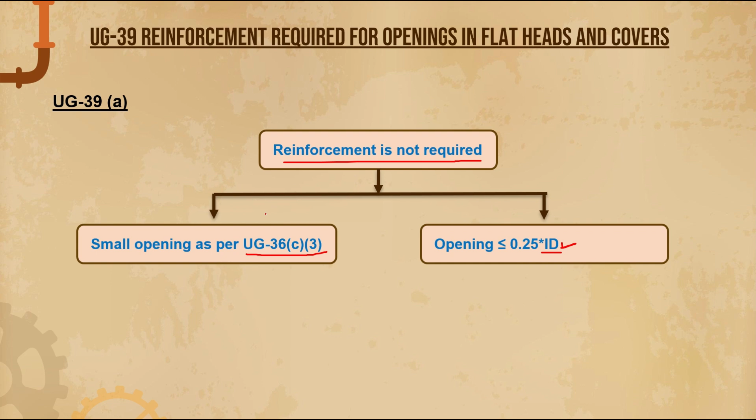I hope you are getting the point. So let's see what UG-36C3 says. If you open UG-36C, you will see strength and design of finished openings. You will get all the rules related to strength and design of finished openings in UG-36A and UG-36C3. So we need UG-36C3.

UG-36C3 says that small openings, which refers to nozzle openings in vessels, do not require reinforcement if you satisfy two conditions. If you satisfy these two conditions, no need to provide reinforcement.

In the first condition, your vessel thickness is less than or equal to 10 mm, and your opening ID is less than or equal to 89 mm, then no reinforcement is required. So reinforcement is not required, guys.

And if your vessel thickness is greater than 10 mm and your opening ID is less than or equal to 60 mm, at this condition reinforcement is not required. So at these two conditions your reinforcement is not required, guys. First condition this one, and second condition this one. If you satisfy these two conditions, there is no need of reinforcement. So this is what UG-36C3 says, guys.

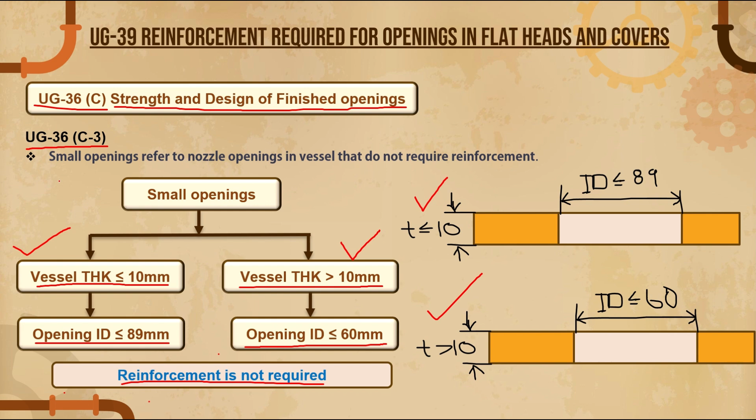So if you satisfy these conditions, in UG-39 also no need of reinforcement. Until now we saw when reinforcement is not required. Now let us see when reinforcement is required.

Reinforcement is required if your opening size is less than or equal to 0.5 into ID of the flat head, then you require reinforcement, you need to provide reinforcement, guys. This is covered under UG-39B. So if you refer UG-39B, you will see rules for opening size less than 0.5 into ID for reinforcement provision.

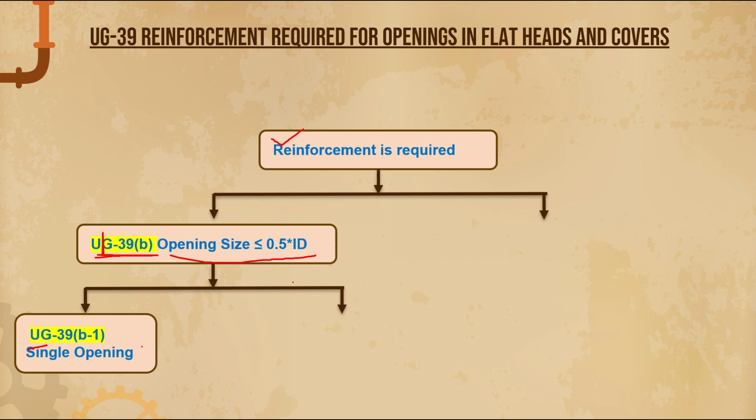UG-39B1 deals about single openings and UG-39B2 talks about multiple openings. So if you go to UG-39B1 and B2, you will see rules for reinforcement for single and multiple openings, guys.

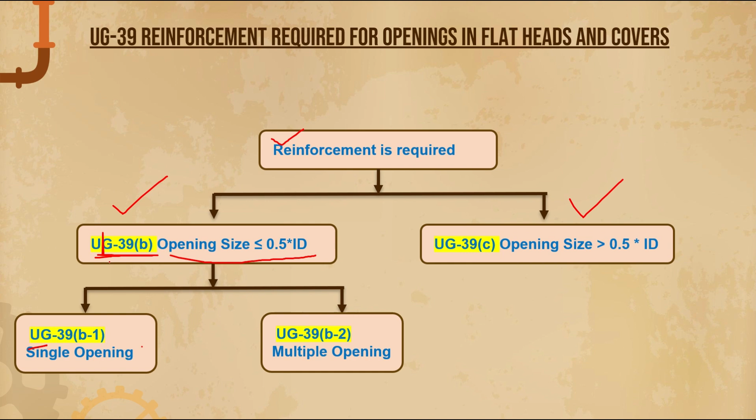And the next one, UG-39C, talks about if your opening size is greater than 0.5 into ID, then you require a reinforcement pad. You need to provide reinforcement pad at both these conditions, UG-39B and UG-39C. So let us discuss UG-39B first, guys.

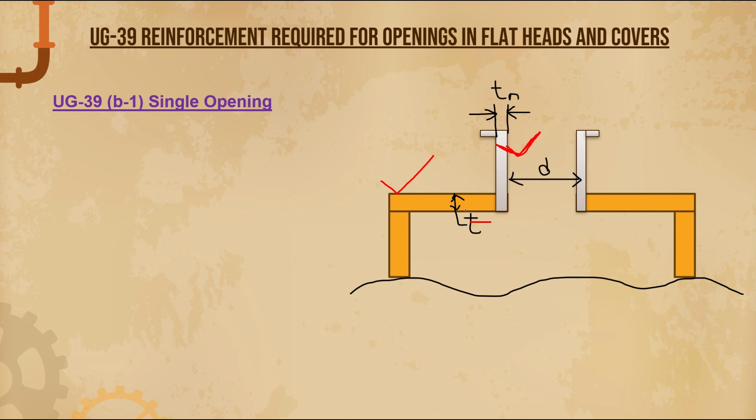In UG-39B also we are discussing UG-39B1, that is all about single openings. This is your flat head, and if your flat head has only one opening, this is your nozzle opening, guys. So this is the inside diameter of the opening, and this T is nothing but vessel thickness, and this Tn is nothing but nozzle thickness.

If your flat head has only a single opening and your opening size is less than 0.5 ID, we already know that if your opening size is less than 0.25 into ID, there is no need of reinforcement. But if your opening size is between 0.25 to 0.5, then you require reinforcement for this single opening.

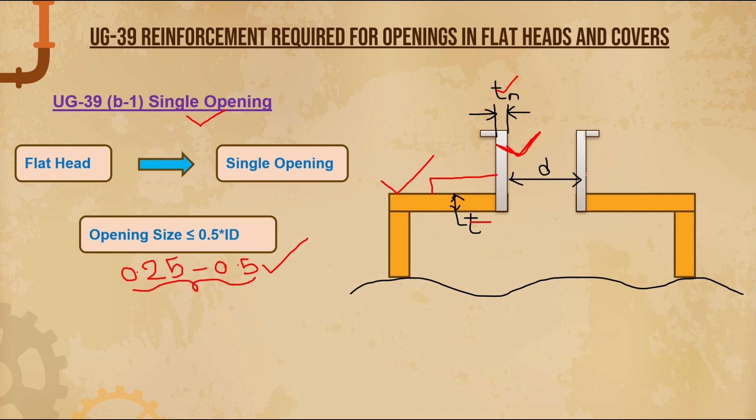So if your flat head has only a single opening and if your single opening size is less than or equal to 0.5 into ID, then you need to provide reinforcement, guys, and this reinforcement area must satisfy this condition.

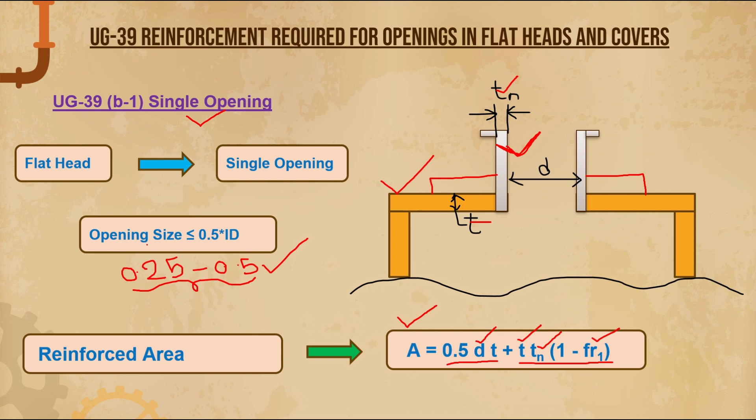So whatever your reinforcement area must be greater than or equal to this value, that is 0.5 into D into T plus T into Tn into 1 minus FR1. FR1 is the allowable stress ratio for nozzle and vessel. And Tn is the nozzle thickness, T is the vessel thickness, and D is the inside nozzle diameter, or inside opening diameter. So for single opening, you need to satisfy this reinforcement area formula.

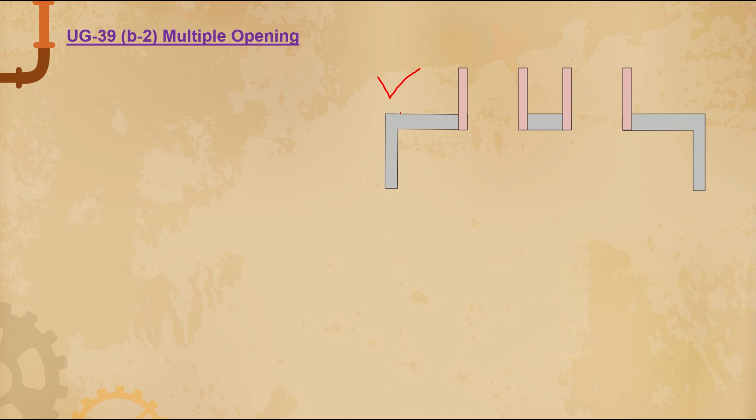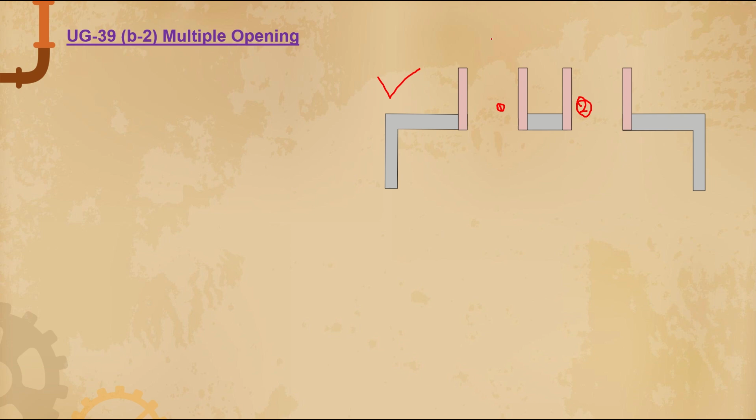And next one, UG-39B2. So UG-39B2 talks about multiple openings, guys. So if your flat head has multiple openings, so this is your flat head, and you have multiple openings. You can see this is one and this is two, guys. You have two openings, a pair of openings is there, and this multiple openings has opening size less than 0.5 into ID. That means D1 and D2.

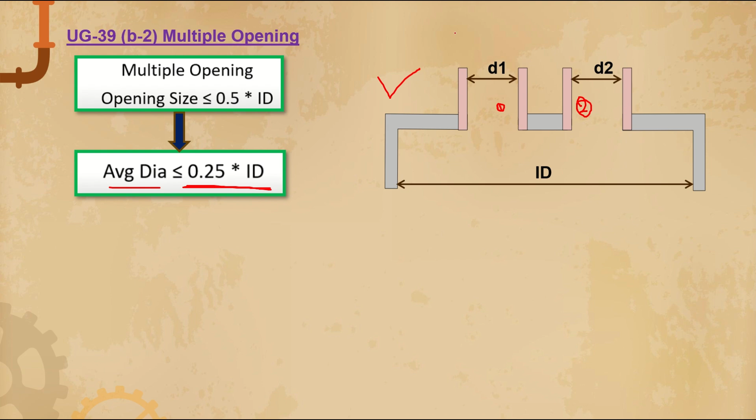If your D1 and D2 is less than 0.5 into ID, and your average diameter is less than 0.25 into ID. So what does it mean by average diameter? So here you have two openings. Your average diameter of a pair of openings is equal to D1 plus D2 by 2, guys. So we already know this formula. This is the basic formula in mathematics we use generally for averages. So your average diameter of two openings is equal to D1 plus D2 by 2.

If you have three openings, then D1 plus D2 plus D3 by 3. So this is the average diameter of three openings, guys. So if your multiple opening size is less than 0.5 into ID and your average diameter is less than or equal to 0.25 into ID, and in this also you will have three different conditions.

The first condition is if your spacing is greater than or equal to 2 into average diameter. Your spacing is nothing but the distance between two openings, guys. This is your spacing. If your spacing is greater than 2 into average diameter, then your required reinforcement area shall satisfy this formula. So I hope you are getting this point.

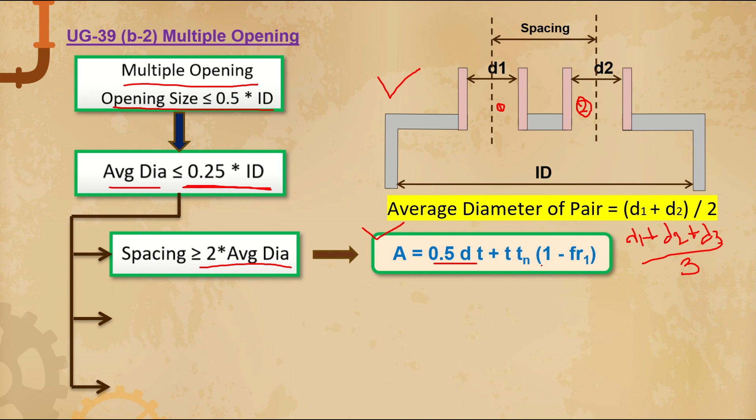So let's see another condition. If your spacing is between 1.25 to 2 into average diameter, we will discuss that in the next slide, guys. So we have some conditions. Let's see the next condition: if your spacing is less than 1.25 into average diameter, then you need to follow as per U-2(g). U-2(g) says that you need to do finite element analysis, or you need to follow division 2, or you need to follow other applicable standards. So this is all about UG-39B2, guys.

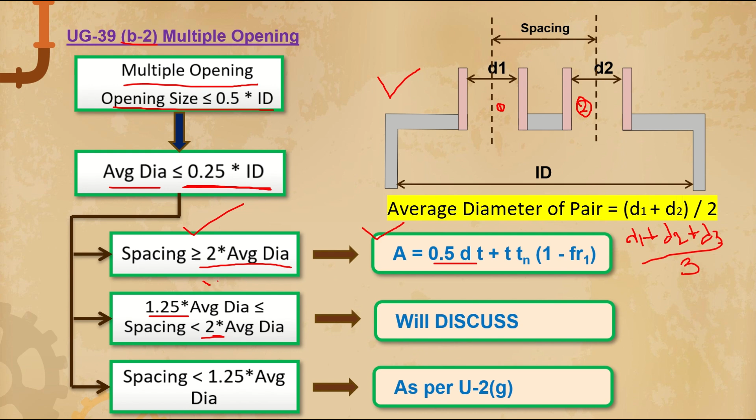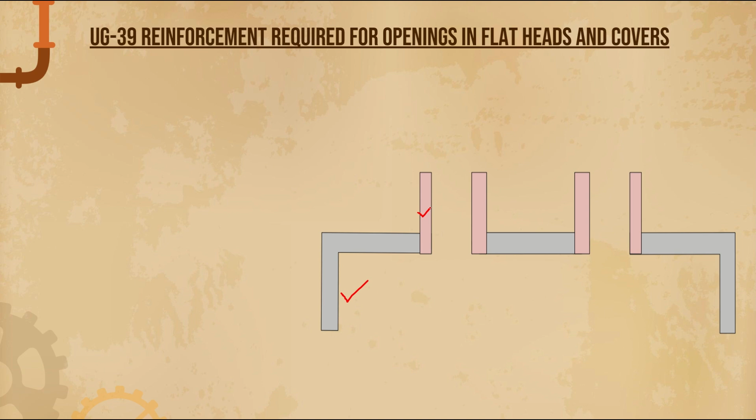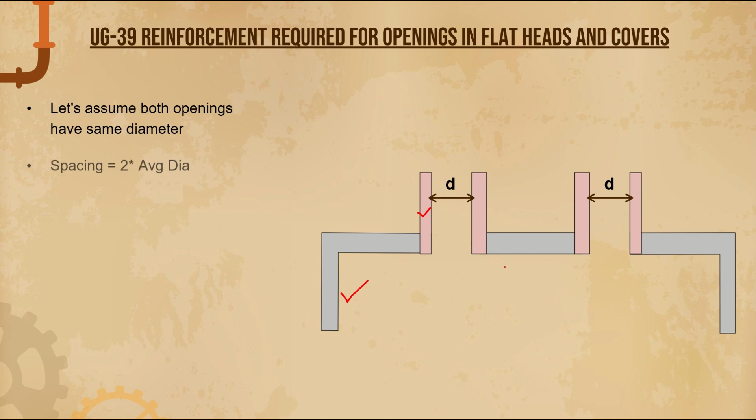So let's discuss these three conditions one by one. So let's try to understand the first condition. So this is our flat head and these are our openings. Let us assume both openings have the same diameter, that is D and D. So both openings have the same diameter. And the spacing, I'm assuming spacing between these two openings is 2 into average diameter. So if you calculate 2 into average diameter, your spacing will be 2D, guys. So you can see here in the diagram, your spacing is equal to 2D.

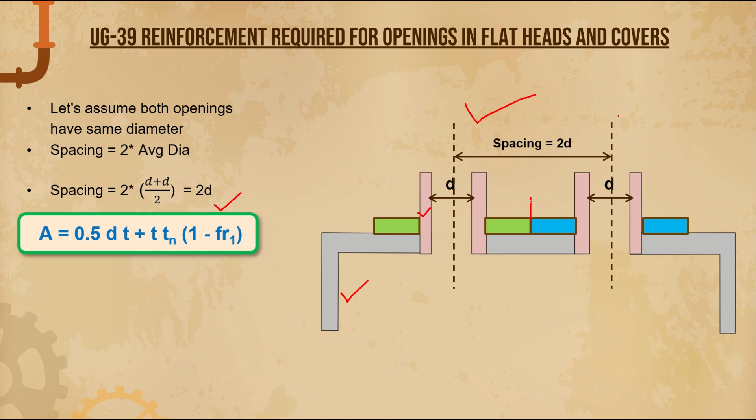Then your reinforcement area is given by this formula, right? So this is what your first condition says. If you calculate this area formula, you will get some value. So if you provide that reinforcement pad in that area, it will look like this. So this is the reinforcement area for reinforcement pads. So this is exactly how it's placed. If your spacing is 2D, your reinforcement pads are correctly located and just touching. If spacing increases, if spacing is greater than 2D, then the gap between these two nozzles also increases, guys.

So whatever this gap between these two nozzles, also increases, so you have enough space to provide reinforcement pads. But the problem is if spacing is less than 2 into average diameter, then this space reduces, guys. So there is not that much space available here.

If you provide a reinforcement pad in that location, you will see like this - it is overlapping. I hope you are getting the point. If your space is less than 2 into average diameter, your reinforcement pads overlap. So let's see the second condition.

This is what the second condition says. In the second condition also I'm assuming the same diameter for both openings, and I'm assuming spacing is equal to 1.25 into average diameter. So this is what actually the second condition is, right? If your spacing is between 1.25 and 0.5 of this value, this is our second condition.

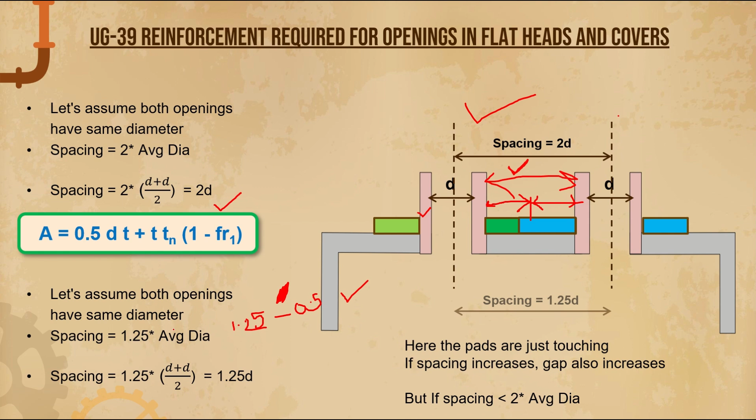So if your spacing is equal to 1.25 into average diameter, if you calculate that, you will get 1.25D. Your spacing is equal to 1.25D. At this condition, if you provide a reinforcement pad, it will be overlapping, guys. I've indicated it in red color, I hope you're observing - these two reinforcement pads are overlapping.

That means some of the area is not present due to overlapping of two pads, guys. So we are not satisfying the required reinforcement area here, because two reinforcement pads are overlapping. To satisfy the required reinforcement area, you need to increase the thickness of the reinforcement pad, guys.

So if you see here, I increased the effective thickness of the reinforcement area. This is how you need to satisfy the second condition - you need to increase the required thickness of the reinforcement pad. So now you satisfy that whatever area is located between the two openings is okay.

So if you provide a reinforcement pad, you will see like this - I increased the thickness of the reinforcement pad, and now the condition is satisfied. So this is all about the second condition, guys.

We know that in the third condition, if your spacing is less than 1.25 into average diameter, then you need to follow UG-39B. So if you open the code book, you will find all this data in UG-39B.

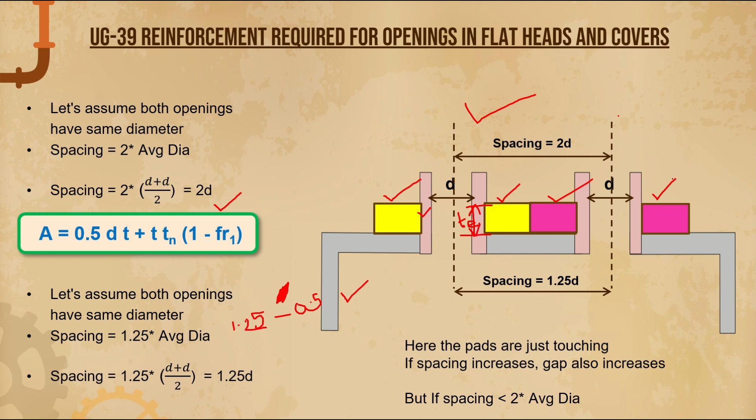So let's go to the next point. UG-39B3, ligament width - what does it mean, ligament width? So if this is your flat head and you have different openings here, like opening 1, opening 2, opening 3, and opening 4 - like this, you have so many openings, right?

So the width between these two openings must satisfy this condition: for multiple openings, your ligament width greater than 0.25 into minimum of D1 or D2. So I want to explain here - whatever U2, U1, U5, whatever you are seeing here, this is nothing but ligament width, guys.

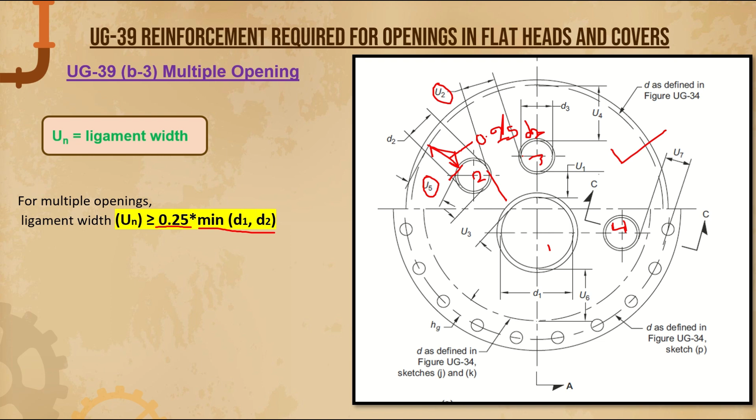Distance between two openings, or distance between opening inside to head - this is nothing but ligament width. So this ligament width must be 0.25 into D2 for this edge condition. So if your ligament width is between two openings, then you need to satisfy this condition - your ligament width must be greater than or equal to 0.25 into minimum of D1 or D2.

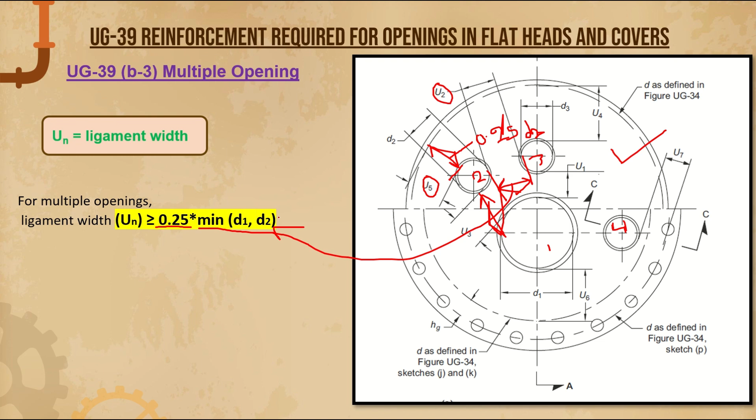For here, your ligament width must be greater than 0.25 into D2 and D3, or D2, D3. I hope you are getting this point. So this is all about UG-39B3.

And the next one, UG-39C. UG-39C also talks about multiple openings. If your opening size is greater than 0.5 into ID, then your flat head is to satisfy mandatory appendix 14. We will discuss this mandatory appendix 14 in upcoming videos, guys.